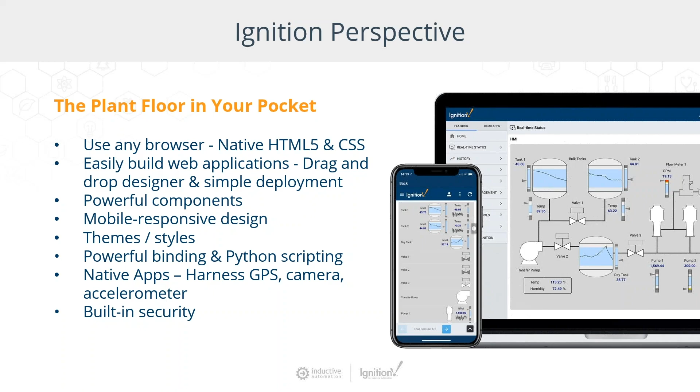All right, so that's kind of an overview of Perspective and sort of what we're going to look at here today, and go into some of these features, like Kevin said, in more detail. But I wanted to talk real quick about security.

I mentioned how we have security built into Perspective. It's a native part of it. I wanted to elaborate a little bit more on that because I think it's a really important part of using Perspective, because people are going to be able to bring data to the business side, if you will, bridge the gap between OT and IT so that we can have data accessible on both sides.

We might be putting that information into the cloud. In fact, today we're actually going to show an example of that, where we could put Perspective in the cloud. And if you understand how the security is built in, you'll have a much better feeling about being able to leverage it in those ways.

So Perspective from the very beginning supports industry-leading encryption protocols. Because it's a web application, we're riding on tried and true security practices that are out there. We're also compatible with federated identity providers. So these allow us to use your company's identity providers that have single sign-on, multi-factor authentication, so that you can have that extension extended out to all of your applications.

So you might already have something like this in place, Okta or Duo or Microsoft ADFS, and there are many others, where I can log into one area. I can have a portal where I can go to any application, and just by signing in once, I have all my applications accessible, and having the ability to support two-factor authentication to further identify who that person is through that second form becomes really important for a lot of applications.

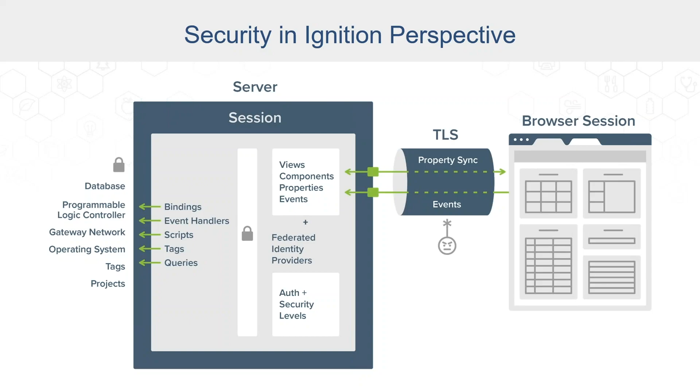All right, Travis, back over to you.

Last thing to mention before we get into seeing the product in action is the Ignition Exchange. This was released at our conference last year in September, and it's a really important tool for the community. You can go in there, establish your account, and upload any Ignition resource you've built—whether that's a full project, a template, a scripting function, a user-defined data type, whatever it might be—for your own use. You can upload it privately, and we can host those resources for you. You can upload it for your organization to be shared amongst everyone there. And most importantly, you can upload it publicly to share with the community, so people can use it in their projects, enhance those resources, and put them back into the community. This creates a huge pool, a library of resources you can start with when building projects, allowing for cross-pollination—different industries post ideas of how they've built their projects, and others can benefit from that. We'll show the exchange in more detail. There's almost 100 public templates or resources at this point that you can pull in, and it's exciting—we're seeing that grow every day.

Okay, let's actually get into the fun. I'm going to switch gears over to my browser. We're going to first go through our demo project. For those who don't know, we have an online demo project where you can see all the features of Perspective. All I have to do is open my browser—right now I'm in Chrome—and navigate over to it. I'll go to a new tab, and the URL is demo.ia.io or demo.inductiveautomation.com. I prefer the shorter one to type in. This goes right directly to that Perspective project.

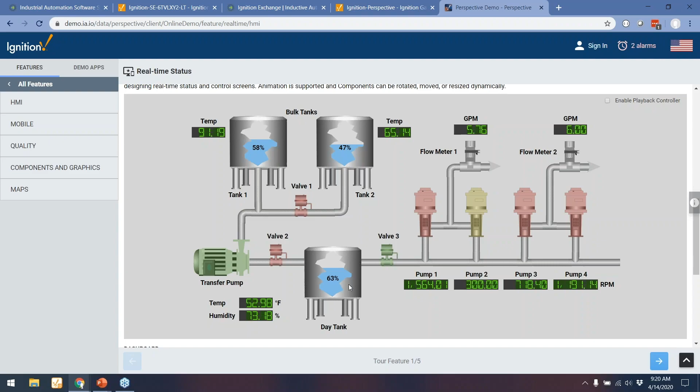And you can also import any SVG or image that you want into Perspective and use that. There's a little dashboard here at the bottom. And as you can see, there's a URL directly to this particular screen, which is now featuring the real-time HMI.

If I go to somewhere else, the URL would change. I can bookmark that and get right to it, come back to it later on, which is quite handy. The other big piece of this is the docking framework, which is a little hard to see here. But this is my main view, where I'm seeing this HMI. I also have a menu over here at the left, and this is a view of its own that allows us to do the navigation, using the menu navigation that's in Perspective.

We can show some more of that. I've got a header view at the top, showing who's logged in, the alarms, maybe the logo or title of the application. And then there's one more dock over here on the right.

Perspective has some very unique ways that we can work with docks. These are just views that we can pin to different sides of the browser—top, left, bottom, or right. They could either be there all the time—I see the menu is there right now on the left—but this one on the right, I can pull out when I want to, so I can see more information about that particular view.

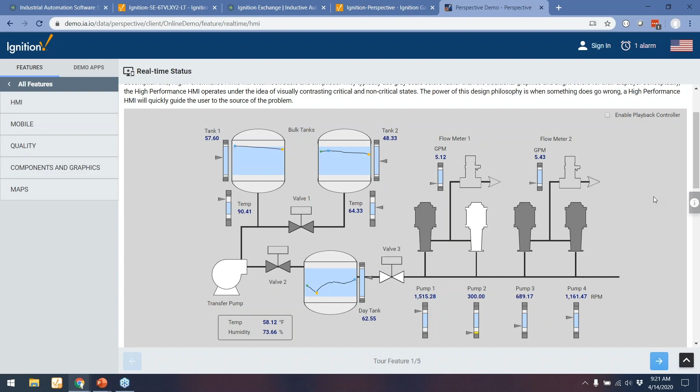The easy way to show that is, I'm actually in Chrome right now on a desktop, but imagine I was on a phone—what would it look like there? So I can actually simulate that by using Chrome's DevTools.

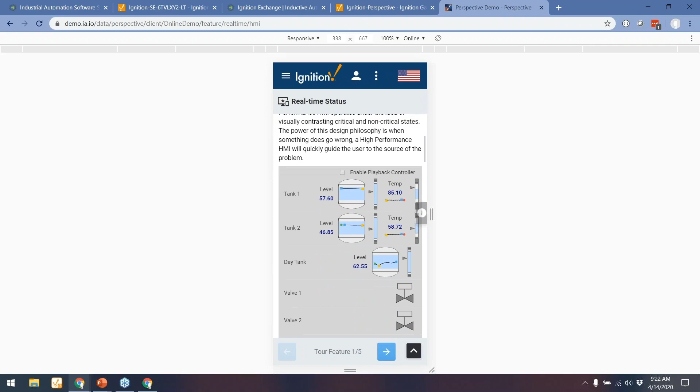I'm going to go here and make this smaller. So when I go to a smaller display, based on how you designed it and which container type you're using, we're going to change it up and show the new way of looking at it. So here I can see, instead of seeing the whole process, I can see the same data, but it's organized in a vertical fashion.

I can still do the same control, all of that, I can see the same relevant data. It's just now more optimized for my phone. This particular page is using a combination of different containers that we have to be able to make this all happen.

As you can see, the menu on the left went away because I don't have enough real estate to keep it open all the time. But this little hamburger icon allows me to bring out that menu when I want to navigate around from one screen to another.

Every part of this application that we built has this in mind. We're thinking about, when we approach Perspective, what is it going to look like on a phone? What's it going to look like potentially on a tablet? What will it look like on a desktop? You can actually define those breakpoints and define what this application looks like at those different breakpoints.

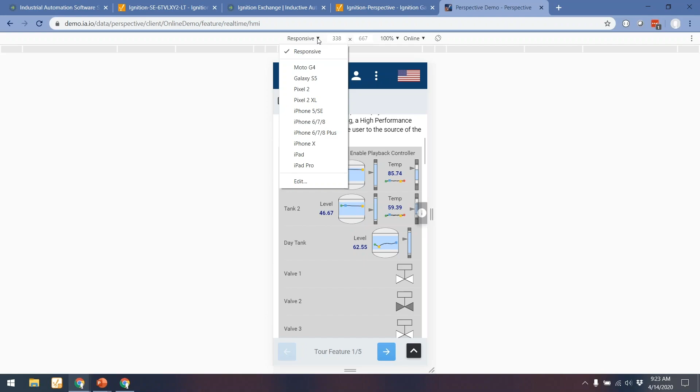If you don't mind, let me take control for a second. Inside these Chrome DevTools, there's a whole variety of popular phones in here. You can see these viewport sizes right here, and you'll notice that these viewport sizes aren't the resolution of the phone. That's an important thing with Retina displays and the rest of that.

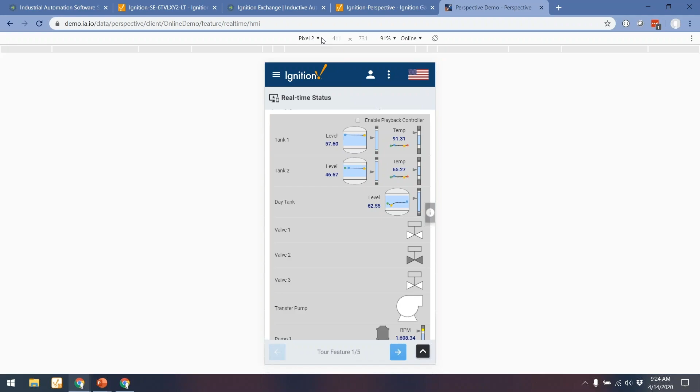The phone resolutions are a lot higher than what you see here. Basically, the phones will map pixels into their own pixels, so the viewport sizes are the number of pixels it's rendering from the web browser, and then this maps it to its own pixels inside the phone. The biggest viewport sizes you see in terms of width are under about 450.

That's why I mentioned 450 before. It's normally a nice place that'll catch just about every device you might be targeting. And if you have a specific target, you can look up phone viewport sizes. You can just Google this—it's something web developers use all the time, and you get a lot of good information on it.

If we just run down, this page specifically has a whole variety of devices. You can see the native resolution right next to this viewport size. So if you're targeting one of the phablets—one of the phone-tablet, really big ones—that might be 480 wide. But in most cases, you're targeting one of these regular phones, and those end up being 412, 360.

These are Android, and then the i-devices—you can see what they are right here too. So this viewport size is the size that Ignition Perspective is going to be detecting and using for those breakpoints. That's the detected resolution as far as Perspective is concerned.

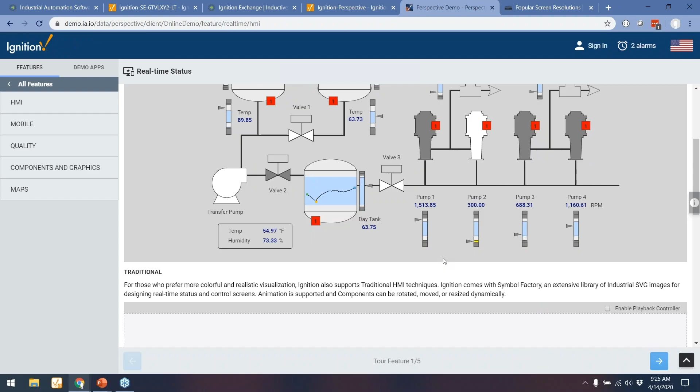Awesome. So let me go out and close the DevTools and go back to the desktop view. Again, you're going to see that come back to the way we first looked at it. But this is just some examples—there's some HMI screens.

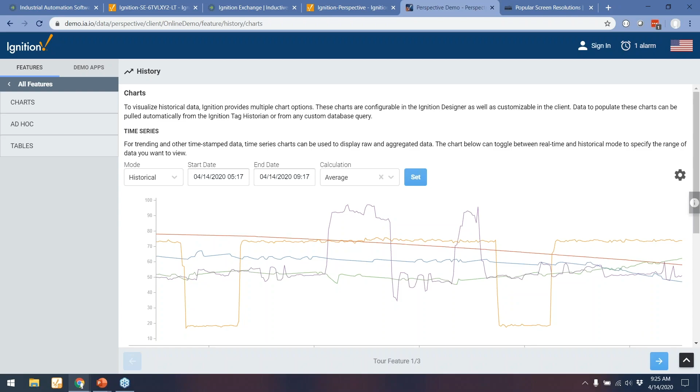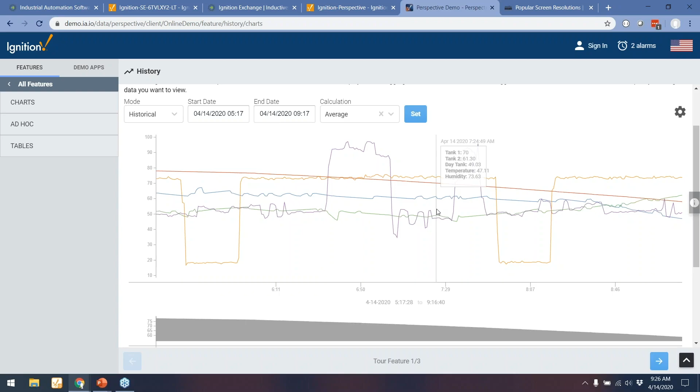Of course, we have the charting components where we can go in there and see history of information, and we can interact with those. One other important point to mention here with Perspective is that it is touch-ready—if I'm on a phone, I can pinch to zoom and all of that. I can pan over the data just by swiping, and all the components are already built for that purpose. So there's a good example of a trend.

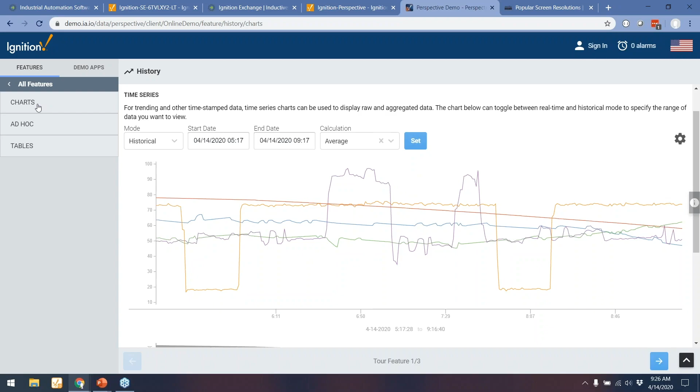Of course, we can look at data in a tabular view. We can export data out, bring it to any format—here you can see it's coming to a CSV file with that. And we can upload files to this as well, so you can go back and forth if you need to.

There's also some alarming—looking at alarm status where I can see the current state of alarms. There's a nice alarm status table that has a lot built into it, so we can see the details of alarms and go in there to acknowledge them or shelve them, to go further with that.

And then same thing for the journal, so I can see history, where we can look at some KPIs using standard bar graphs and pie charts to query data and look at those ways. And of course, there's an alarm journal table to go into that history in a little more detail as well.

So some of the fun things that are in this demo project, along with being able to view those PDF reports from the reporting module—they're on screen, you can export those, download those, and view any type of report that you want. We can build applications, forms where we can enter data in.

That's a very common thing to do with Perspective, to input data, whether that's being sent to the PLC or put into a database. We can work with that and have validation on it. So here you can see I need to fill in those fields, but if I did, I can add that information in and interact with it. This is very much like a database inventory example, interfacing with a database.

We can also bring in web services and views. This is kind of an idea of a Go board where we can see news and weather here. And again, all of this is mobile responsive, so that if I'm on a phone, I can see that in an optimized way. There's a lot of cool, fun things in this project, and we encourage you all to take a look at it some more.

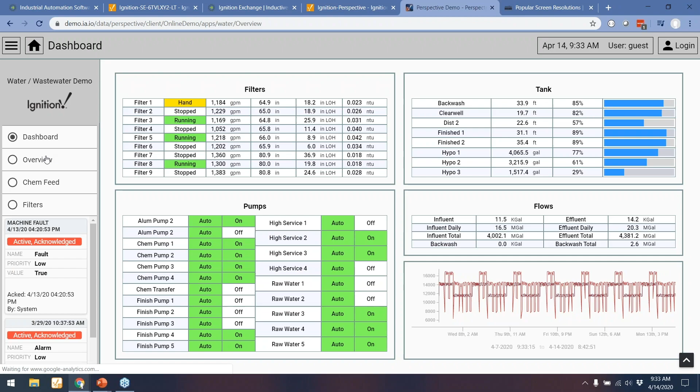The other thing to mention, I didn't show, but there are some demo apps, specifically one that shows a water wastewater example in more detail, kind of all self-contained. We can go and look at that and drill into it. Again, mobile responsive design there as well.

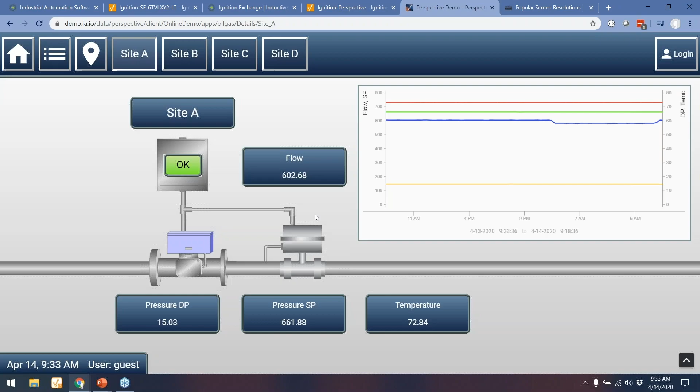There's also an oil and gas one that shows the use of the map component, putting our data on top of that, and also using it for navigation, to navigate from one area to another. As you can see up here, using those URLs to our advantage, I can go from site A to site B just by typing that in, and I'll get to that other area.

And there's a cool one for the RFID badges as well, using the same map, but for scanning badges. We can see the history of all those and look at what employees have scanned in this particular example.

So some fun demos there, available to play around with, really showcasing features of Perspective. One of the nice things about the demo project is that if you're thinking about doing anything inside Perspective and want a starting point, or want to see how it was created, or want a mental library of a few types of things you can do, if you're familiar with this demo project, you should be able to mentally go, oh yeah, I saw this there, we could pull this in from the demo project.

You've got the project resources available, downloadable on our website and on the Exchange. So all of these screens you're seeing right here, you can dig in and see exactly how they were built and the different pieces. When we built them, we tried to keep them as straightforward and simple as possible.

So you're not going to see any heavy scripting behind these things. 90% of the screens are essentially drag and drop, bindings and connections, and very little scripting. We tried to make it as accessible and easy as possible to just import these and use them inside your own project.

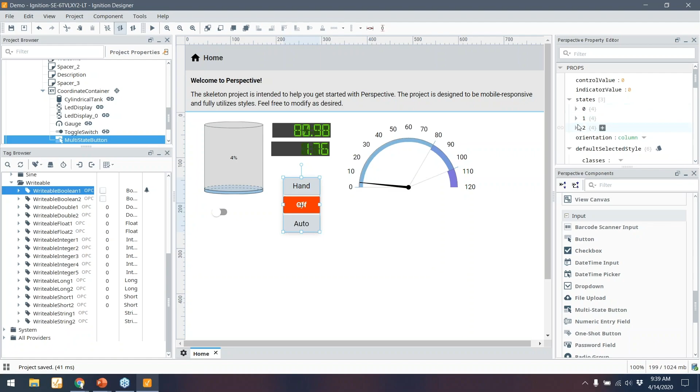For example, if I go down here to a multi-state button and click on that, every component has properties for how they change, how they work, how they behave, how they're displayed. The multi-state has 3 states: HOA, hand-off, auto. We can change those, add more states, and link the control and indicator properties to tags.

I can link the control and the indicator by dragging and dropping that over, and I can make this bidirectional in that binding so now I can write back to it. Very, very easy to do.

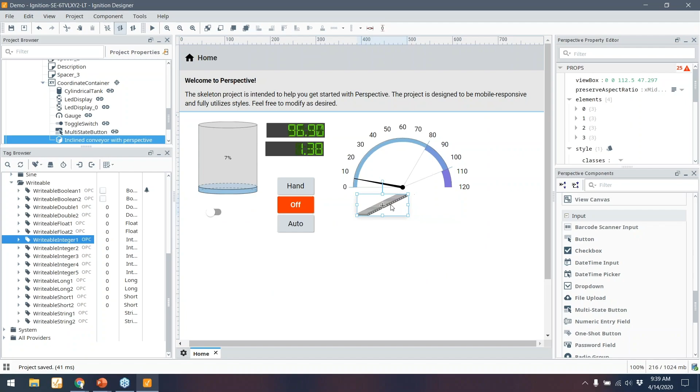The other thing we have in our binding system is some really powerful things that are possible. If I take a graphic, like a conveyor here, or any SVG, I'm going to flatten it, which gives me one element on top. I can change the fill paint. I'm going to bind the fill paint to a tag, selecting the WriteableInteger1 tag, but we'll add a transform. These transforms allow us to manipulate that data very easily.

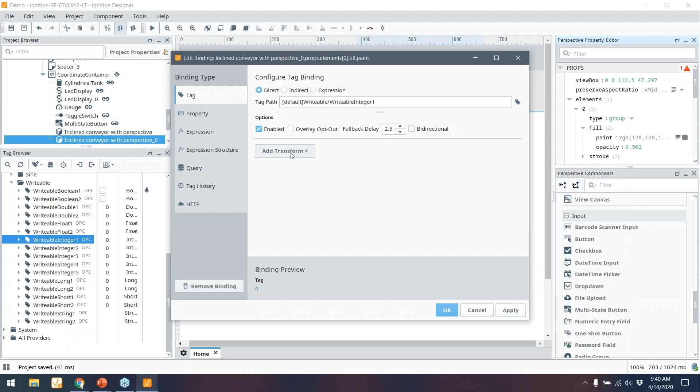We can bind our properties to anything we want, and manipulate them by mapping from one thing to another, applying expressions or calculations. We can format it. We can also do Python scripting.

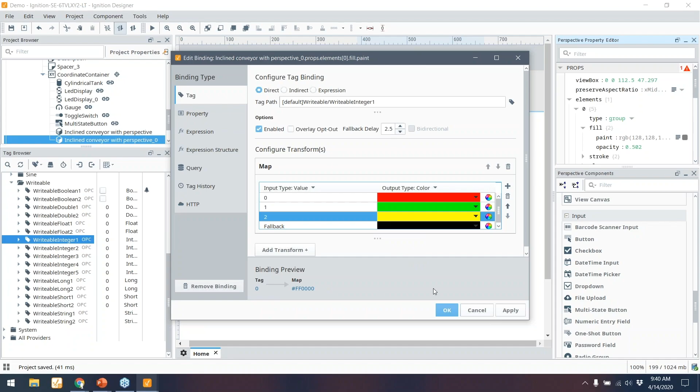So I'm going to do a mapping from a number to a color, to really show off this in an easy way. If the value of the tag is 0, it's going to be red. If it's 1, it'll be green. And if it's 2, let's say it'll be yellow. Now I've got that set up, and right now the value of the tag is 0, so it's red. We're good to go.

Now let's save our changes and deploy it. When I save, we're going to save that to the server. We can have hundreds of clients out there looking at data, and we can push that change out there. There's no polling in Perspective whatsoever—it's all push from the server up to the browser. So now, of course, I can interact with it, turn things on or off and really work with it.

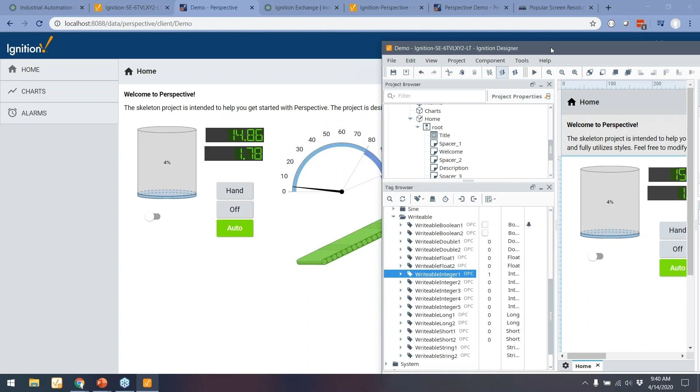The other thing I wanted to point out—there's a lot we could get into—is styling. Along with all the components, there's the ability to apply styles. I'm going to do that by putting a label on here, saying hello world. I can go over here and change the background color of this—let's say I want to make it red—change the foreground, all these cool things. That's inline styling. But what I can actually do is go over here to Perspective Styles.

I can define my own style—let's call this just 'style'. In there I can do whatever I want. Let's make the background light orange, make the text 24 pixels, make that a blue color, and let's make it bold. Maybe I want to align it center. All these different things we can apply, and we can press OK.

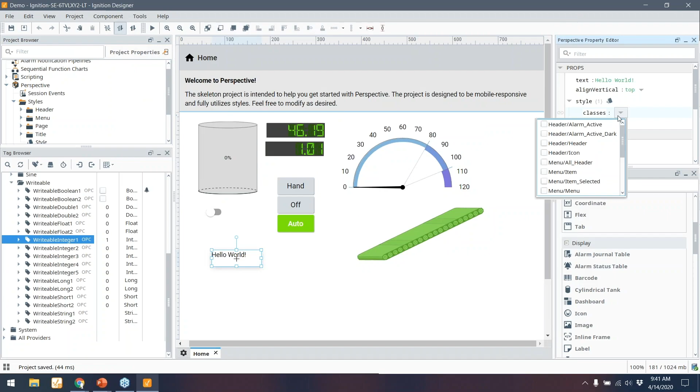Now on my label, I can simply go in, click on style, and associate that with the label—you can see it automatically got that style. I can have multiple things get that same style. If I put a text field on here, a completely different component, I can use that same style, and now they both have it. If I go in and change the style, it affects both of those automatically.

What I'm going to do is go in here and not only change it, but add animation to it. Let's do something simple: change our background from a light red, with the text being 24 pixels, going down to the text being 12 pixels, and the background being a different color—let's go to light green. Nothing too exciting, but with styling we can do more than just affect the background and foreground. We can have that animation going on, and we can also add styles for when we hover over it or when it's selected.

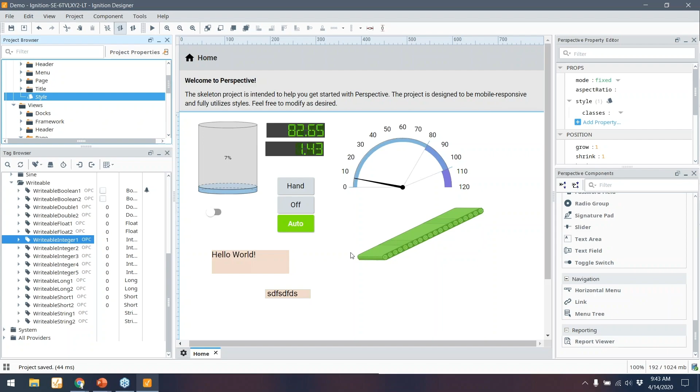Various things allow us to define all that in one place and apply it to multiple components. It really gives us that flexibility of working with styling, and again, we can save that and deploy it out very rapidly.

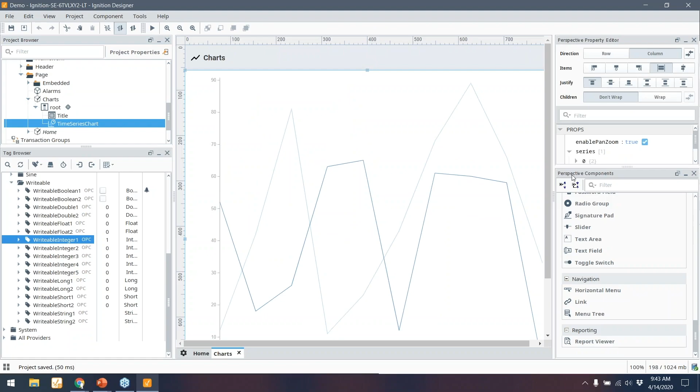Whether we're doing real-time status or adding a time series chart, like this one, I can get data through binding. So I can bind this to tag history, go back the last 5 minutes, poll it every second, and get a tag, Realistic0, just one of those for now. Save that, go to my application, go to my charts, and now I've got that real-time trend coming through.

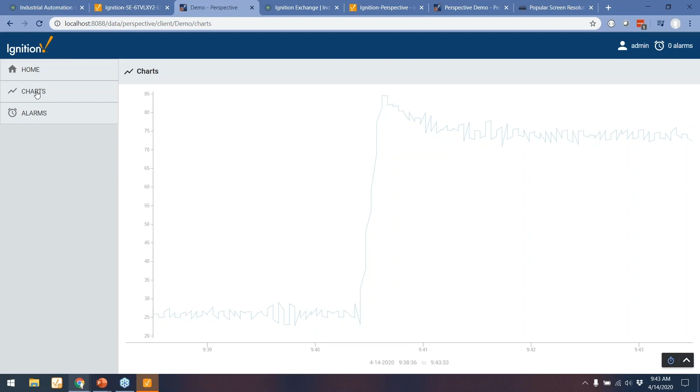And of course, we can customize that further. We also have the alarms on here. I have an alarm configured, all very easy to start deploying. I've got a full application ready to go at this point, so hopefully that gets you something.

So the question, for those not familiar with CSS3, is basically about the styles we're showing. Is there a file on the hard drive somewhere that can be opened to change those styles when applying them to specific locations? Can you change those specific styles by editing the CSS3 directly? Over to you on all of that, Travis.

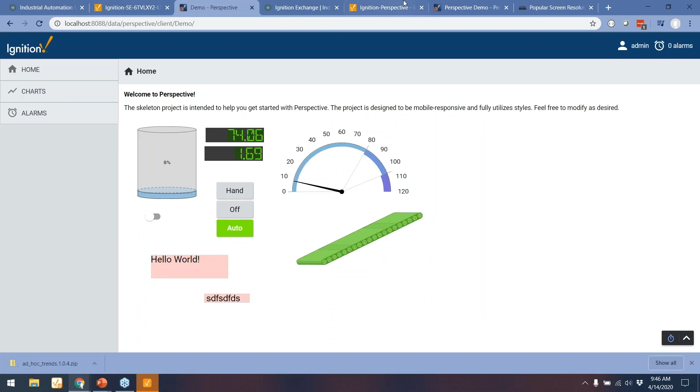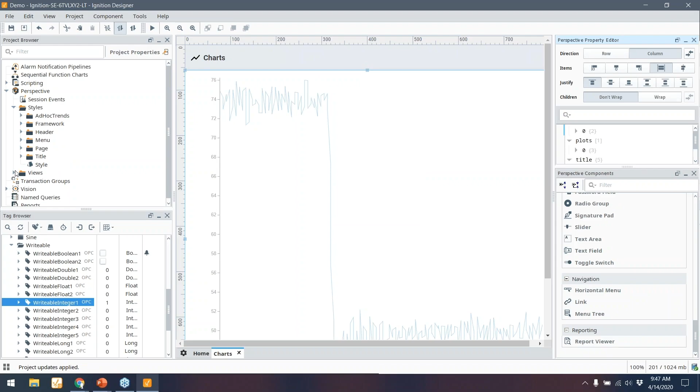I can come back to my local system, go into the configuration area, go to the Exchange, and import this package there, the ad hoc trends. Come down here, click next, and I'll bring it into that same demo project. I'm going to go ahead and import. Now in my designer, if I click on update project, in a moment we're actually going to see the ad hoc trend come in. There it is, it's now available. I'm going to go over to my menu and add a menu item, duplicating this one, which will go to /ad hoc.

And the label will be 'ad hoc trend' there, and I don't care about the icon at this point. So I got that new one in there, and then I'm going to add the URL for /ad hoc. And we're going to use the ad hoc trends screen.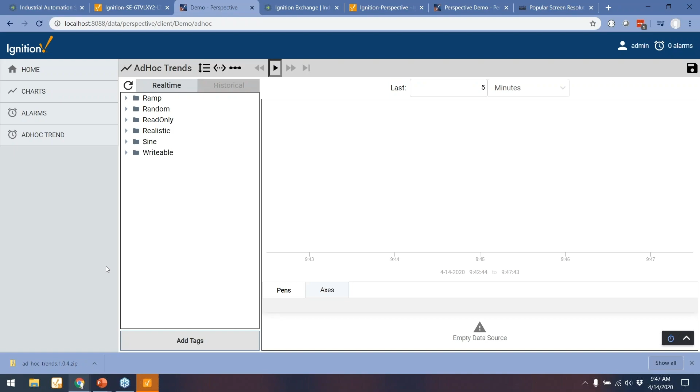So now I've really added a whole new menu item to this project. Let's go over to our demo, click on ad hoc trend, and now I've got the ad hoc trends - that new template from the Exchange in here - and I can start working with it. I can add multiple tags, play around a lot more, export data, change pens and axes, and so on, using that to my advantage.

So the Exchange is a great resource that we can all use. Yeah, thanks for showing that off, Travis. I actually had a couple of additional questions before you pass it over to me.

Is it possible to convert Vision into Perspective screens? So I wish the answer to that was yes, but unfortunately there is no conversion utility for going from Vision to Perspective. They are two different paradigms, and we wanted Perspective to be built from the ground up using the latest technology. So while it might be technically possible to do some of that, not 100% conversion, there just isn't a utility at this point. It's better to figure out how you want to build that in Perspective from the ground up, especially because mobile responsive design really changes the game and how people think about it.

And all your tags, history, alarms, and everything else inside Ignition is just there, which is worth noting. So you have different screen design for Vision and Perspective, but all the rest of the pieces - the reports, the queries, all of that - is system-wide, not tied to Vision or Perspective specifically. And even all of your scripts, any that don't interact with Vision specifically, you should be able to use in Perspective and Vision just as easily. Anything in your script library can be called from both places.

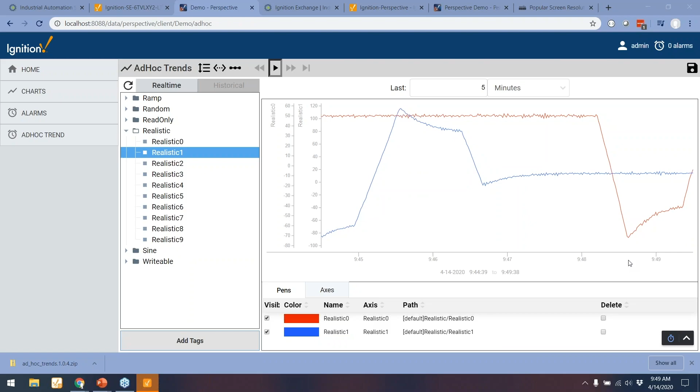So you're not starting completely from scratch, but it definitely does take some work to do the visuals inside Perspective to get them to match or get them close to what you have inside Vision, or to go through and do some improvements at the same time.

Next question: there's one I'm about to address, which is what settings do I have to do if I want to access the application from outside the gateway network, or outside the network that Ignition is sitting on? That is a great question, and in a few minutes I'm going to say, hold my beer.

The next question: any recommendations for software that can save graphics into SVG format that would work well with Perspective? Perspective has a slightly more limited set of path support when pulling in SVGs than Vision. Inkscape seems to do a decent job, although there are a few things missing from it. You can always use SVGs if you upload them through the image management component though - just upload them to the images and display them on the screen, and that should work for every single SVG you have. The only thing you don't get that way is access to the individual paths, so if you want to drill down and do separate coloring or animation for a subset inside that image, then that's where you need the drag and drop support. We are working to improve that over time as well - it's something we want to continue adding to the subset of the spec we support inside Ignition. But yeah, Inkscape I found the most success with, but it's not 100% there.

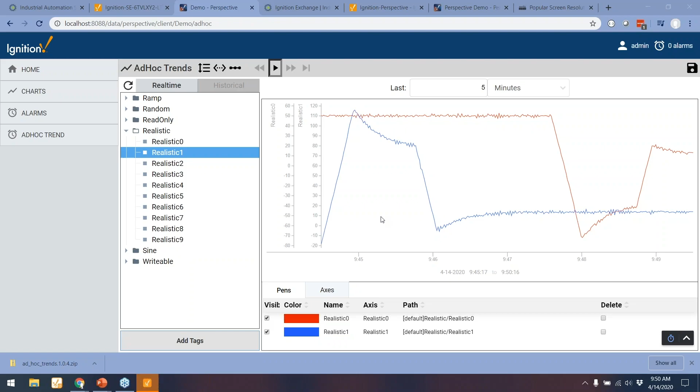Yeah, sure, it's a great question—determining when to use Perspective versus Vision. Perspective, from the mobility side of getting data to the business, is really the best option, no question. You can use it in parallel with the existing Vision you have to add that value. It's about looking at these two visualization platforms, understanding how you're going to get value out of them, what kind of applications you want to build, and who your audience is that's going to receive that data. Once you figure that out, you can figure out where the development effort's going to be. That's how I think of it.

A lot of new applications are going to go the Perspective route. For us, we're going to be coming out with a Perspective Workstation Edition, which is basically a desktop wrapper around the browser to add in some features that Vision provided as an application that Perspective didn't have, because we're relying on the browser. If we have the wrapper where the browser is embedded, we can add some of those features back in, much like the native app adds features to get access to our phone. So there's more to come with that as we go forward.

We can help you make your decision, help make that decision a little bit easier.

Thanks, Travis. All right, so what I am showing here is the basic way that you can connect up to Ignition from the outside world. You have a plant network, you might have a corporate network, and your network topology is likely more complex than just a simple line here, but I wanted to show a couple of options. As I only have about 5 minutes, I'll fly through this, but this is one option folks use sometimes: they'll VPN into the existing plant network and connect up to Ignition.

So what I'm going to show here, and I'm pretty much right near the end of our time, but it's very easy for me to show it. This is my system in the office. On this system, I have an Ignition gateway, and this gateway has a whole set of tags. It's connected to a real Micrologix processor and also a simulator.

What I'm going to do is go to my gateway network and set up an outgoing connection. I'm going to point this at an online spot - a server that we just set up at secure.ia.io - pointing it there over the gateway network. As soon as I point it there, it's going to set up as running.

Then when I go to secure.ia.io, you're going to see that we get an incoming connection here. This incoming connection from the gateway network is coming from my local system - this would be the plant system right here. You can go through and either approve it or deny it, and set up security for these different things. I have this incoming connection approved here, and now this connection is in place.

From this secure.ia.io, I'll come down to my tags and just set up a remote tag provider. I'll call this remote tag provider 'my plant.' It's going to let me browse my different tags that are down there, so I'm going to browse that, set this up as plant, come down here, create that tag provider, and it's now set up.

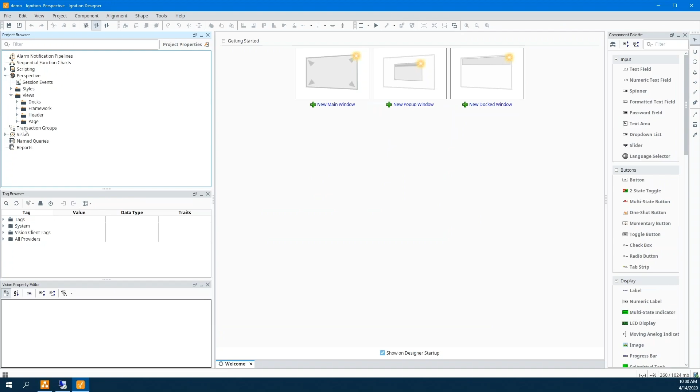Inside this project now, you'll notice that because I'm using some of these screens, I've got some similar pages to what Travis was showing earlier. This is one of our nicest templates - I really like it. So if I come over under my tags, here are my plant tags. I've got access to them, and they're streaming through. If I want to show them on the screen, I can do that very simply.

So I can come in here with accumulator level, maybe that's inside a tank - I'll drag that in, there you go. And my humidity might be something that I care about. I could pull that in, show that right alongside this, and do an LED display there, and it subscribes, and then I've got my humidity.

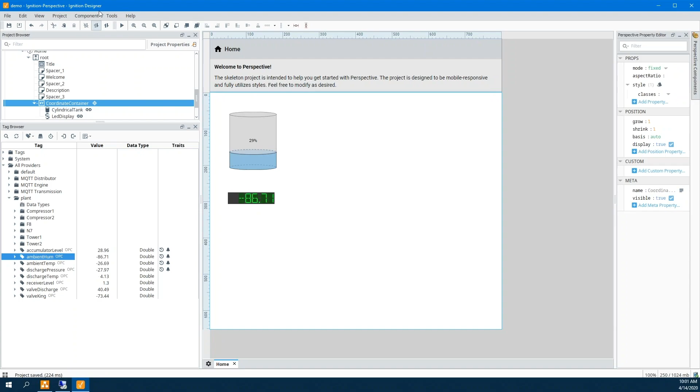I'm just going to save this project off, and you can see if I launch this, this is my perspective session right there. If you at home want to launch this, you can go right here - this is at this URL. If you go to secure.ia.io from your mobile device, you should be able to see what we have right here. I'm actually going to go to secure.ia.io and use that redirect that Travis was talking about. Inside the web server gateway settings, we have that homepage redirect, so I'm going to set it to data perspective client demo.

So this is the page that I just have set up there. And now when I go to secure.ia.io, it automatically launches this. If you've scanned that QR code, or if you've typed this in, then you're going to see that as well. This is information streaming from the plant, which happens to be my server sitting inside an office that's completely separate from the cloud server there.

All services are defaulted to read-only. We have that security set up by default. So if you want to change that, or you need to change it, potentially you could. But by default, that is going to be read-only access. You're not going to have read-write access to it.

If you do need to change it, you can go down to your security levels, the service security, and then inside the service security, this is where it's set up for what you might want to do. So this is read-only for all of these tags, and you can change that right there. I'll pull back up that thing so you can scan that if you did want to.